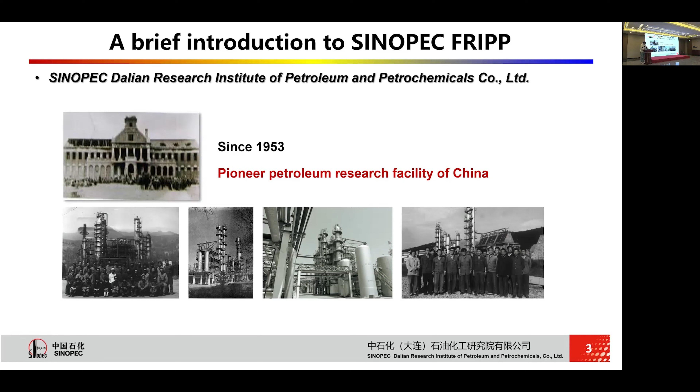First, let me introduce my company briefly. My company was the first founded Petroleum Research Institute of China, founded in 1953, about 70 years ago. You can see the picture, it's a very old building located in Fushun, and below is the pictures of some of the pioneering petrochemical technologies developed by my country. And now we are relocated, moved to Dalian, and we built one of the most advanced research institutions of petroleum.

The major business of my company is hydrogenation technology. We hold about 50% of the market in China. Today I'm going to talk to you about the new business of my company, which is planning and scheduling in oil refineries.

The oil industry is a vital bridge between the raw materials, which is crude oil, and the products. Well, the process is so complex. All the reactions and transportations are at high pressure and temperature, and the process is continuous.

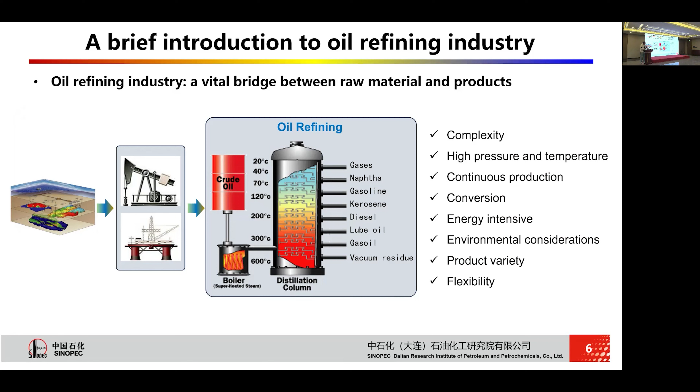The process networks are very complex. We can use different crude oils to produce the same products. So the product variety is high, and the process is very flexible.

Therefore, we have to use algorithms and models to optimize the whole process for planning, because all the oils are shipped from outside countries, starting from 3 months before. So we must predict the next 1 to 3 months for all the planning and scheduling.

According to our research, the planning business will affect the whole margin of the plant by about 15 to 30 CNY per ton, which is the most significant factor for all the processes.

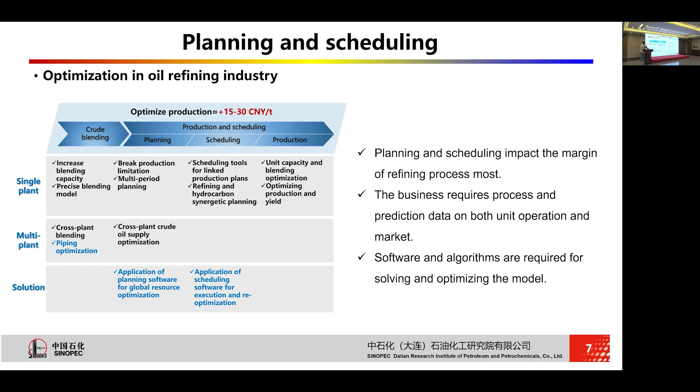How do we do that? We first need the precise data from the process and unit operations, and we also need data from the market, like the price, like the demand and supply. So I'm going to talk about 3 aspects.

The challenges in the process modeling and the optimization models. The first one is, I believe, the interface between the process modeling and optimization model, because the two models are fundamentally different. We have to use some data transmission to communicate between the different models.

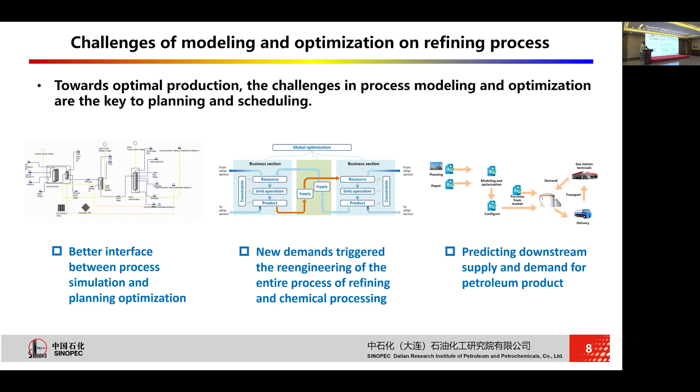The second one: we are thinking about expanding the model horizon to investigate how the plants will be in the next 10 to 50 years. And the third one, we will use the model for predicting some downstream planning optimization process.

So this is the recent work of us. The first one is the interface between the process modeling and the optimization models. In process simulations, we can model the reaction process with high accuracy, but in the optimization model, we have to linearize every equation, so we have to make approximations to linearize all the process simulation data.

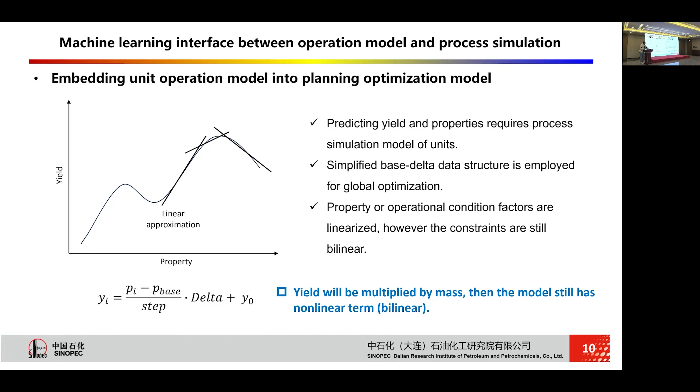The basic idea is simple, but when we apply the idea to industrial scenarios, it becomes complex, because in industry we have so many simulation platforms. We have commercial simulators, we have in-house software, we have industry data. All this data is in different formats and different styles, so we cannot efficiently model all that data inside our optimization model.

So here's what we suggest: we introduced a new layer of data-driven surrogate model. We train it with machine learning models, so all these models will be trained into a data-driven model, and we can unify all the data formats.

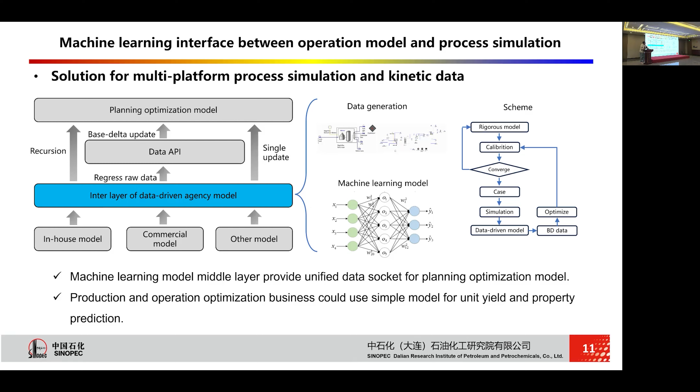This is better for the industry staff to use, because when modeling the whole plant at your computer for optimization, you have to focus on the global optimization, so you cannot present an accurate process simulation for each unit. Using our middle layer, you can neglect all the detailed stuff, and you can focus on the global optimization.

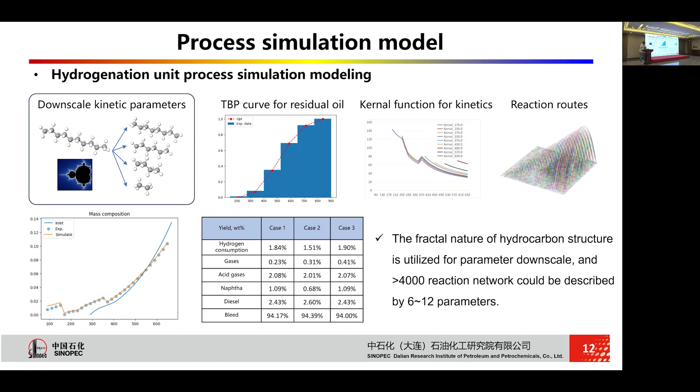We can use our in-house software for the hydroprocessing kinetic modeling, and we can also model all the unit operations with commercial platforms.

And we can train all the machine learning models with the data-driven model. You can see the picture below. When we integrate all those models into the optimization model for planning purposes, it will bring a lot of deviations when we optimize the capacity of the whole plant.

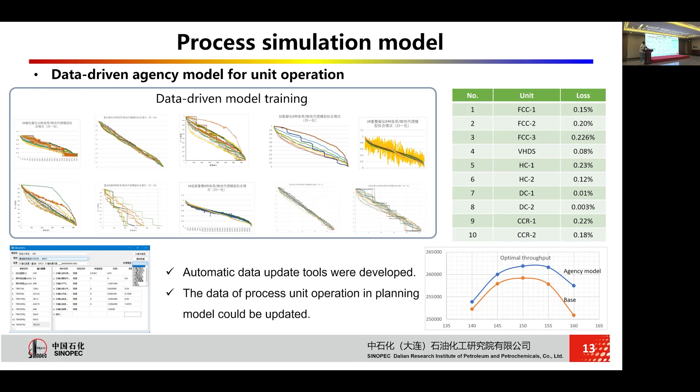So this method brings the industry a simple way to utilize all the process simulation data, because time is valuable in the industry. We have to do the optimization every day, and we don't have time for all this data from the process simulation. But if we simplify the process, it will be easier for us to use.

Second, we expand the model horizon. We are interested in what the refining industry will be in the next 10 to 50 years, so we introduce more dimensions into the model. Usually we focus on the mass streams of the optimization model, because the mass streams represent the oils. We sell oils, we buy oils.

But in the future, the carbon tax will bring more expense to the whole process, and the hydrogen will be produced with cleaning energy. So we have to focus on different streams. We call them element streams: sulfur streams, hydrogen and carbon. We focus on all the elements' flow in the whole process, and we also introduce energy streams like electricity, steam, and fuel gas.

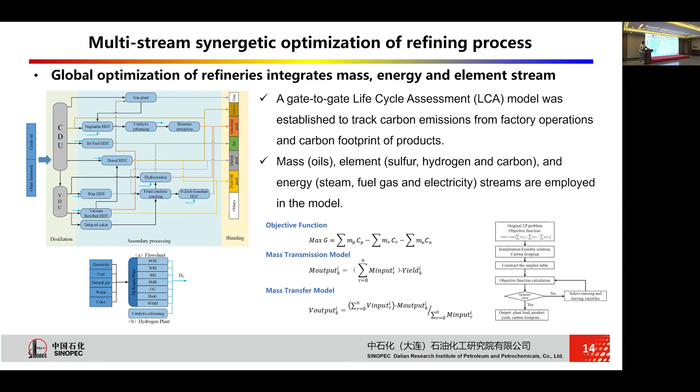So when we add all these aspects to the model, we can build a hyperstructure of all the refining plants. And when we use such a model, we can observe, at each different level of carbon tax and hydrogen cost, what the best configurations of the plants will be.

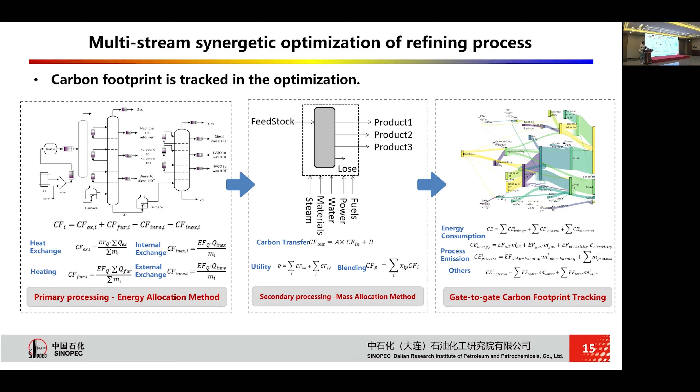So here are the carbon footprints tracked in the model. When we do such optimization, we not only get what we need to buy as crude oil and sell as products, we can also know how much carbon footprint is in the products. So when the carbon tax is considered in the real world, we can know exactly how much carbon footprint is in the product.

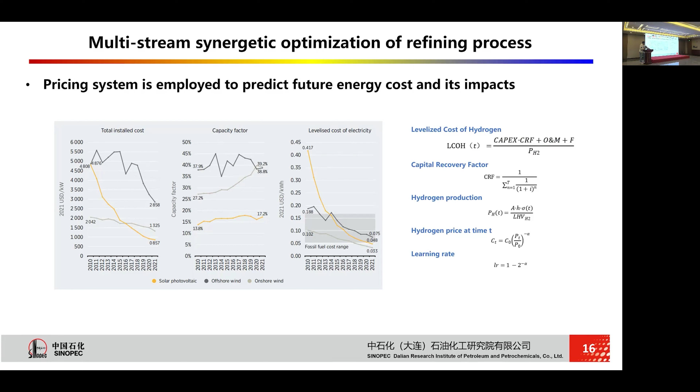To better predict the future, we also introduced a pricing system based on the machine learning model and the empirical model, so we can know at different times how the carbon and the crude oil will be priced.

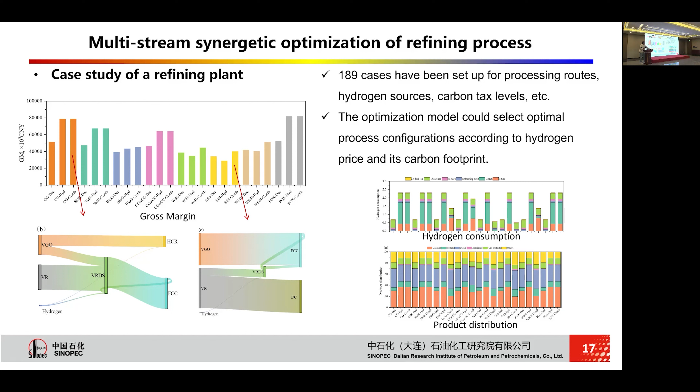We built about 200 cases for the investigation of all the different processes. We can see, although when the hydrogen cost, hydrogen price, or carbon limitations and carbon taxes are different, what unit operations we prefer and what unit operations we don't like.

In the long-term prediction, we found that when the hydrogen cost is low, because we have more renewable energy and the hydrogen becomes greener, we prefer to add more hydrogenation units to the refining process. And if the carbon tax raises and the hydrogen technology is not there yet, so we have high hydrogen cost, the refining process prefers the fluid catalytic cracking unit, which has a lower hydrogen cost but higher product oil yields.

So the purpose of the model is to foresee what the refining plants will be in the next decades, and we can use such a model to predict the future and to re-engineer the whole processes.

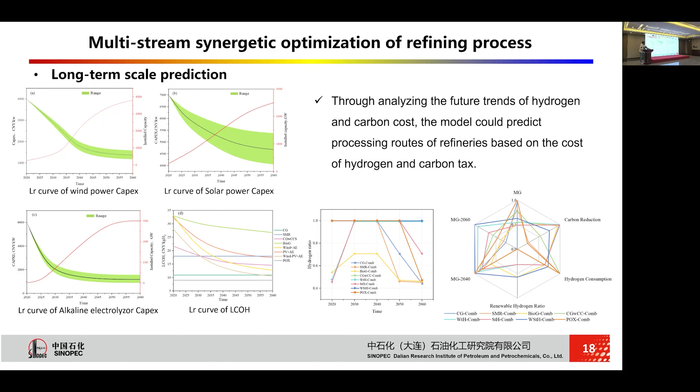And lastly, something about downstream optimization. When the oil is produced in the refining plants, we have to transport it to the gas station terminals. The process is simple, but there's something we must know: we must know what the demand is and what supply we can provide. Using that data, we can make the logistics plan and optimize it.

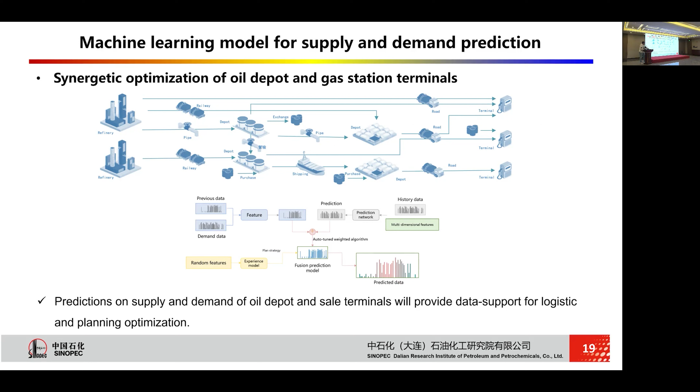But how do we predict the demand? We tested all the models of machine learning. We tested transformers—although the transformer model provides us a lower loss, it fails to predict the daily data. So we tested all the models and found LSTM was the best one. It's fast and its accuracy can satisfy our needs.

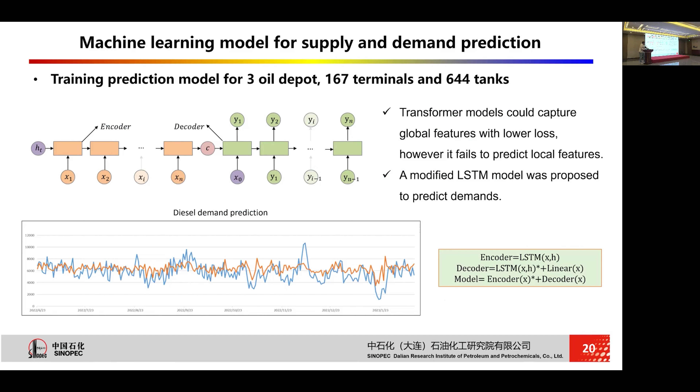So we modified the LSTM model and introduced several dimensions like weather, price, events, and other production features. The model accuracy is improved, and we can now predict the demand for special events, making the model more practical.

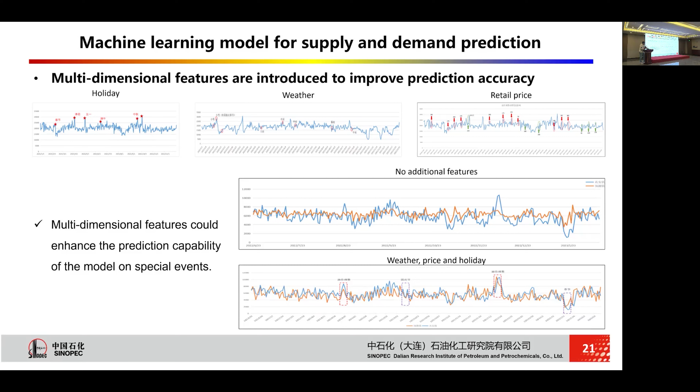Here's an example of our demand predictions. We can accurately predict the demand of diesel and gasoline at gas station terminals, and use this data to build a logistic optimization model for all the transportation plans. We used this to design software that predicts all the demands and generates a transportation plan and vehicle arrangement schedules for Hubei province's product sale company.

Here's an interesting part: we found that the transformer is not capable of predicting the daily demands. Some other models are very good, like the Informer model, but the computation cost is too high. We have about 600 gas stations to model, which means we must build at least 1,000 to 2,000 models, and the models must be iterated on a weekly basis. So computation cost is something we must consider.

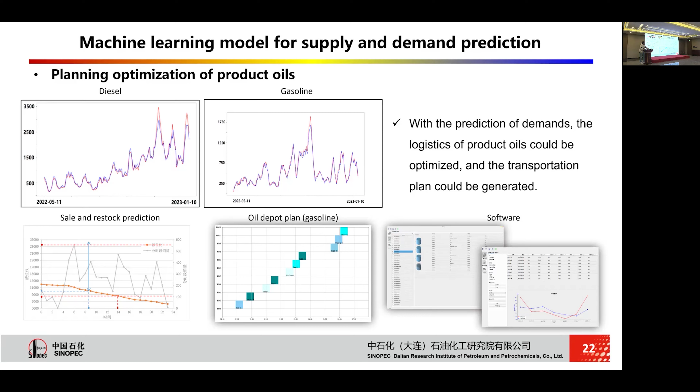We tested all the models. Still, LSTM is the fastest one and has the lowest error, so we still chose LSTM. This is some of our recent work.

We are now working on introducing more AI technology for the oil refining industry. So I'll give you some perspectives about how the industry will be and what the industry needs from the academic community. The first one is planning and scheduling.

We need more powerful nonlinear solvers to optimize the whole process. The industries are desperate to embed highly nonlinear solvers to integrate process simulation and connect the models to the planning optimization models. We know all the equations, but we simply cannot integrate the process simulation model into the optimization model because no solvers can solve it.

The second one is the matrix. We form a matrix, and we found that in our industry the matrix is so sparse. Seldom are there linear libraries that can solve those kinds of matrices, which means we need better matrix operations to solve the problem.

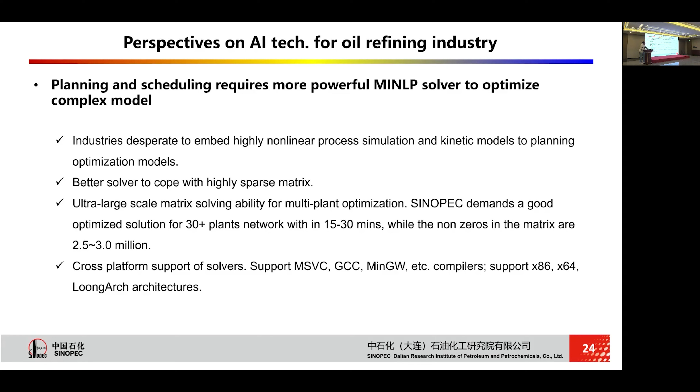The second one is large language models. Large language models are a good interface between people and complex software. But there's a problem with LLMs: they cannot give you accurate and specific results because of their nature.

But we found that in the planning business, all the data, results, and decisions are in the form of natural language, and we don't need an accurate decision, we only need a direction for the decision. So LLMs are the best choice for the industry. We are now working on training large language models to understand the whole planning process and provide us valuable decisions.

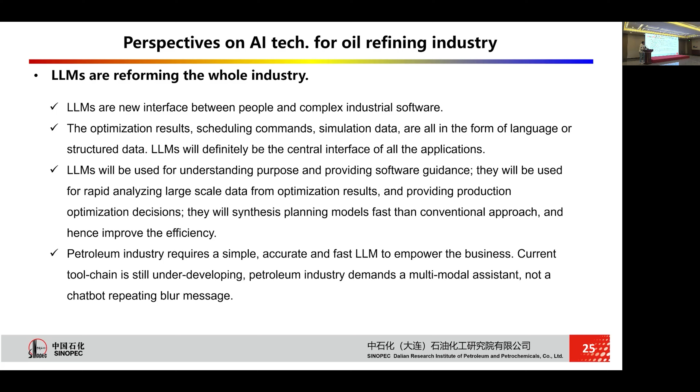We also require the model to analyze large-scale data and optimization results, which will help us rapidly optimize the whole plant, even multiple plants.

The third and last one is generative AI. Generative AI is a popular subject in recent years. Someone has used generative AI to design catalysts and materials, but in the refining industry, I have never seen a model that could design a catalyst for the refining industry. The problem, I think, is that we lack data.

It's a black box in the industry. We do not know what happens in the reactor, so we cannot provide enough data for the generative AI model. But I believe this will change if we optimize the model and gather more data. I believe in the future, generative AI will be a powerful tool for the process.

We expect generative AI to design catalysts. We expect it to automatically model the whole plant. We also expect the AI model to design reaction loops and re-engineer the whole process. If we can reach that goal, we can generate more data for the AI model to train itself. I believe someday we could use generative AI to produce more opportunities for our industry. And that's all.